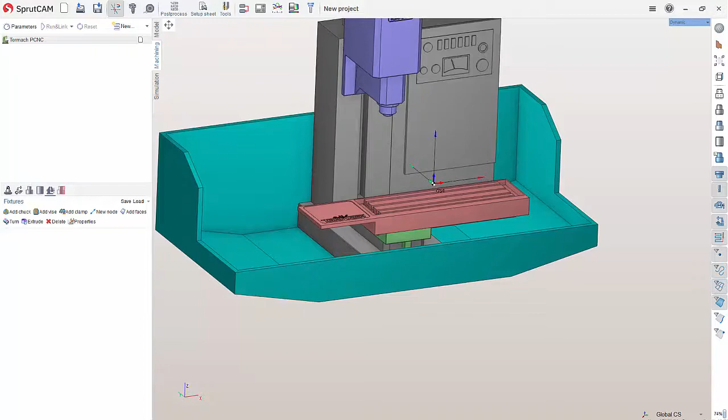Now to do this we first need to get the solid model. This can be found in the description below at our knowledge base for SprutCAM America, or you can also acquire it off the Tormach website on the Vise's product page. The part number for this is 35285.

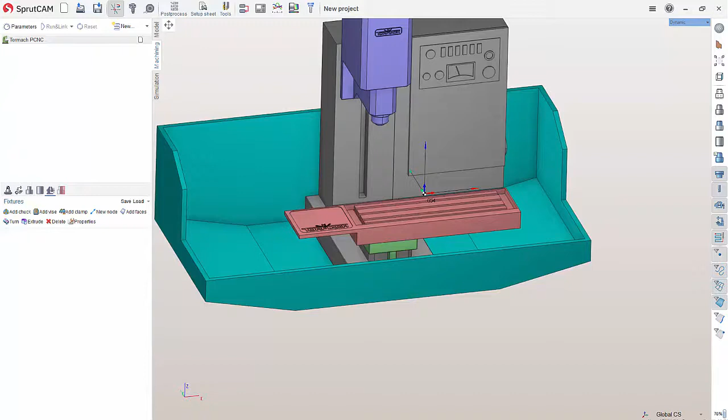Now I'm going to drag this 4-inch vise into SprutCAM. It can be either the IGES or a step, either one will work. Just going to let that load in.

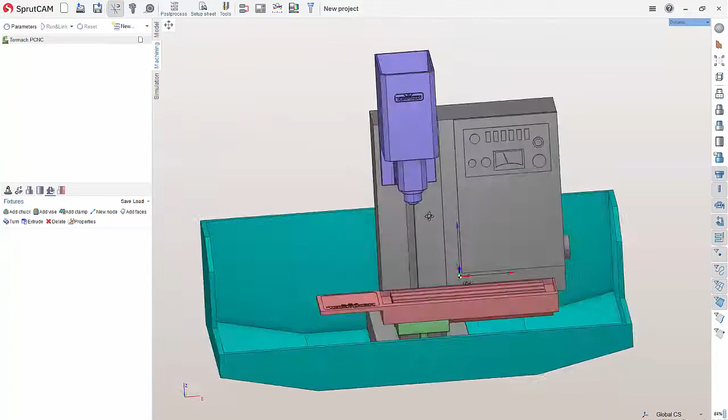So in here we have our vise. Let's get this oriented. Let's go to the model tab and click part, click the vise, and hit transform.

Now first let's get this rotated around the X so we can see what we're working with here. So let's just rotate this 90 degrees and hit apply. Okay, now we'll take a look at it.

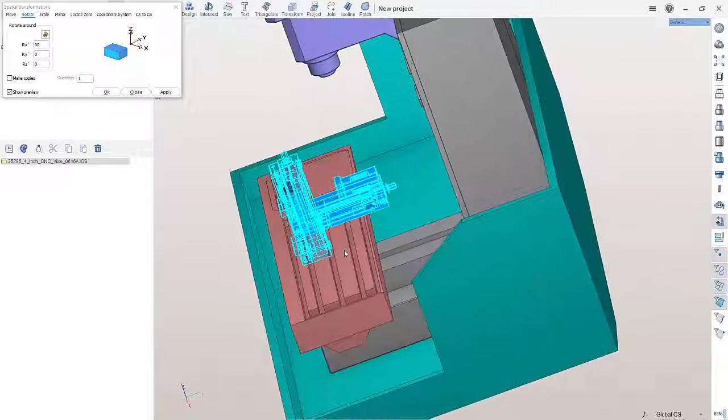We need to flip it around this way, so let's rotate this around the Z axis. Let's put 0 in X and around the Z 180 degrees and then hit apply. And we can then hit close. All right, so we now have our vise sitting like so.

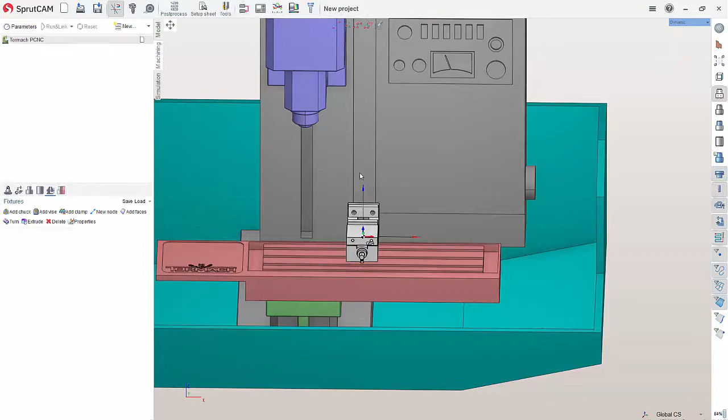So let's go to the machining tab and we need to select the faces for the jaws and the body. So let's hit, with the machine definition selected, go to fixtures and hit add vise. And then down here where it says body empty, double click empty.

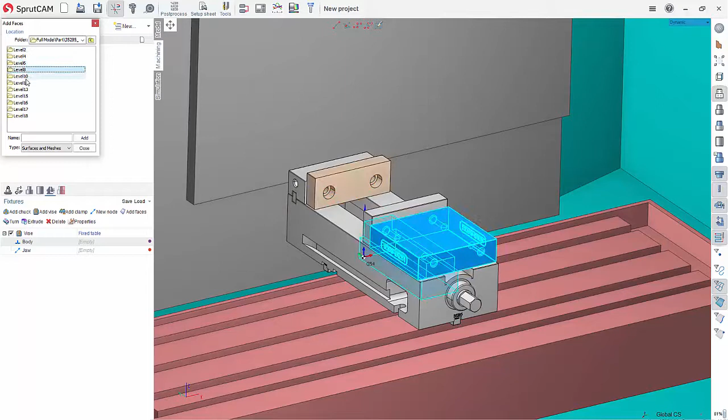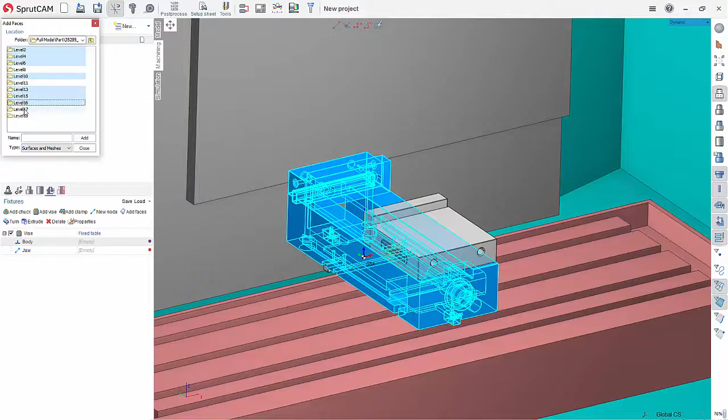Go into the model here and let's find all the parts here that are a part of the base. And it looks like this one is, this one is, this one is. So level 8 we don't want. Level 10 we do, we don't want level 11. And I think we can just select the rest of them, so I'm just holding down control as I'm selecting there.

Okay, and I'm going to hit add. And then I'm going to close.

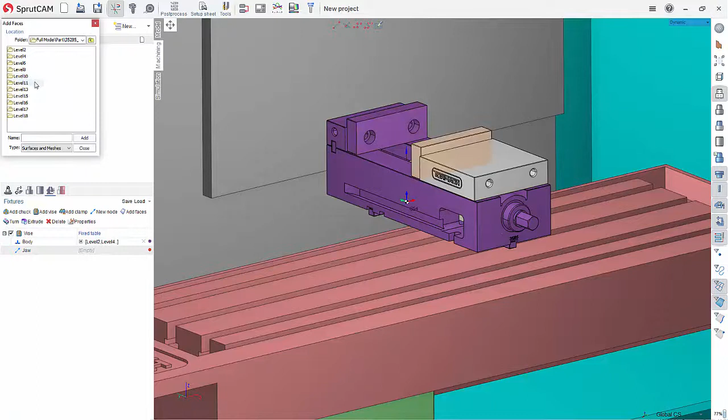And then let's go to the jaw, so double click there. And we're just looking for the parts, so it looks like 11 and 8, these two right here. And then let's hit add.

Okay, so now we've got our vise there. Now if I move this in, you'll see that the model is still showing from when we imported that in. So let's just turn that geometry model off.

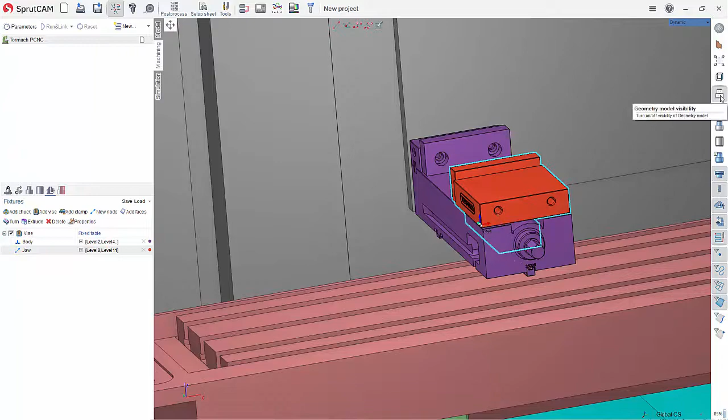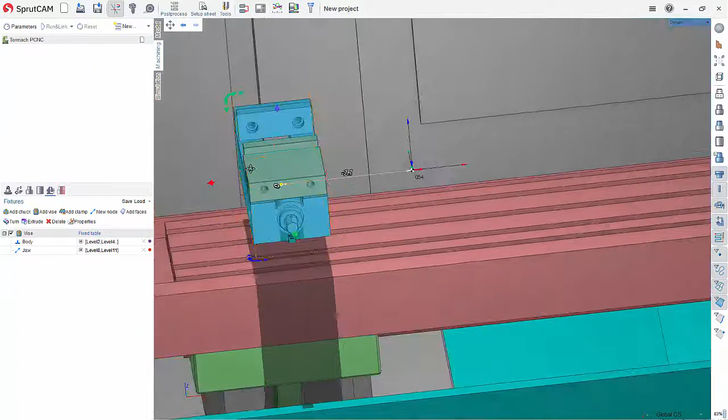All right, so we can now click vise and we can align this up. I'm going to show you two different ways to align this, but first we'll just do it like so. You can align this any way you want. So these arrows, red, blue, and green, will line it up in X, Y, and Z accordingly. And these will rotate it, the arrows that are on the corners in each axis.

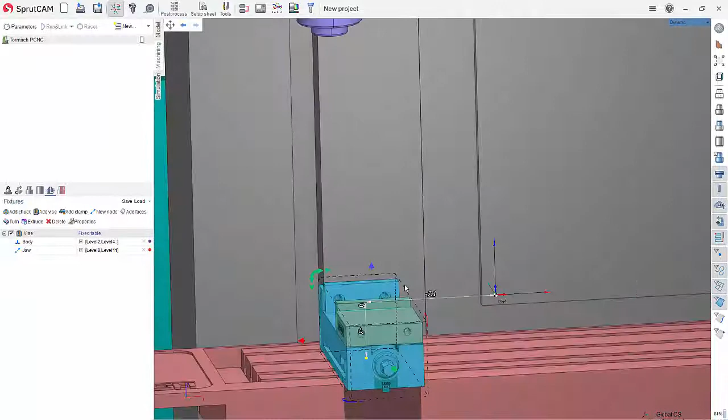Okay, so I want to have this lined up somewhere around here on the table. I'm going to grab this and I'll bring it down and it'll snap right to the table. You don't have to worry about it going through, you can force it through, but we can just bring that right down to the table.

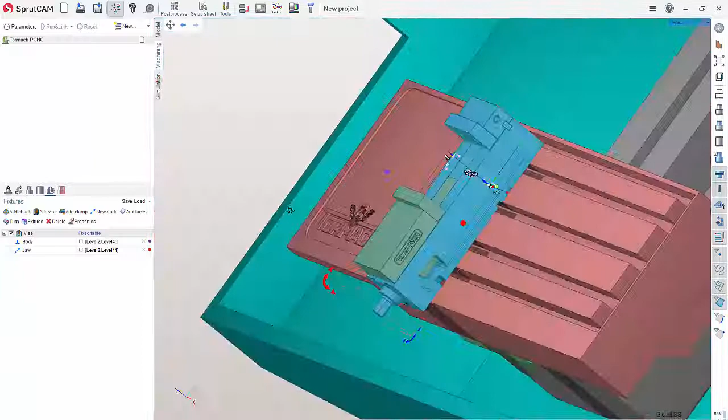And then we just want to line this up in Y. And again, you can kind of put this wherever you want it on the table, wherever you think that is about lining up with the T slots there. Okay, so we've got that lined up.

Now let's double click our jaw. Not over here, over here on the left hand side, don't do what I did. So double click jaw on the left. And here is where we are lining up this jaw.

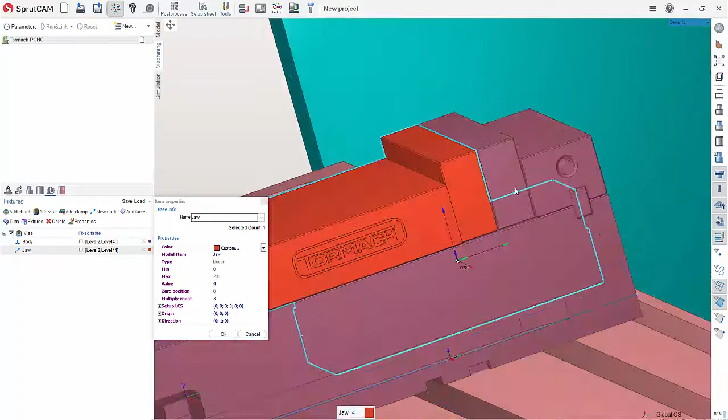Okay, now you can see this says 4 when we have this closed off. So let's set this to 4 inches. So for max, type in 4 and hit enter. All right, and that is it. All right, so those are closed.

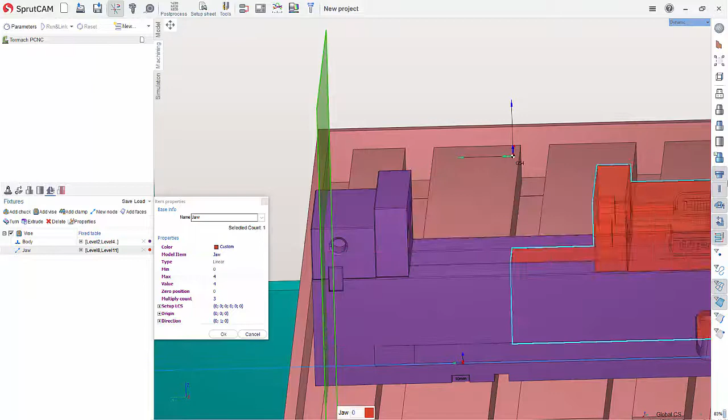And we don't have to touch this value, this has already been set, so it's really just that right there. And now you can see it won't go any farther. So just by setting that max to 4, we've got it. We can hit OK. Now we are ready to save this vise.

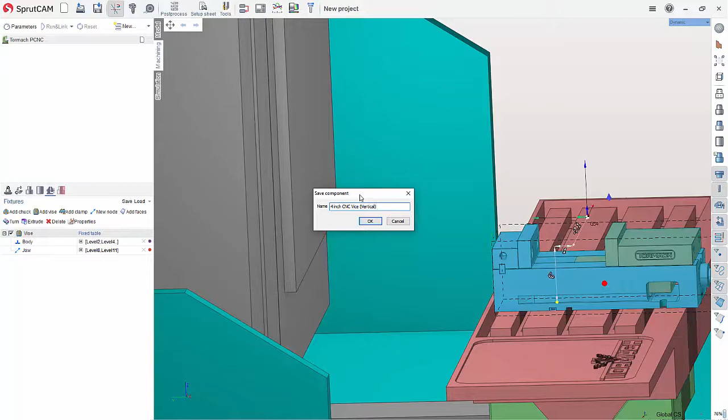So let's right click Vise and do save. And let's name this 4-inch CNC Vise. And I'm going to name it vertical on the side. You don't have to do this, but I'm just going to name it vertical. I'll show you why. I'm going to hit OK.

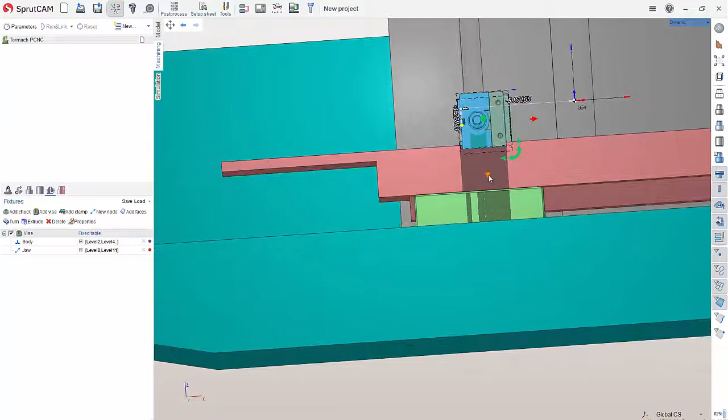Now, let's say because this is a CNC vise, you can turn this on its side. So we can click Vise here. All right, and let's rotate this along the Y. All right, and now we can set this down on here.

So why are we doing this? This is because you can use your CNC vise like so. So now you can come in here, right click and hit save.

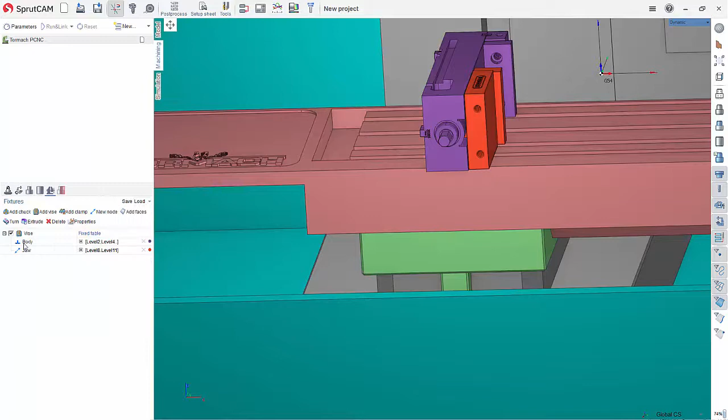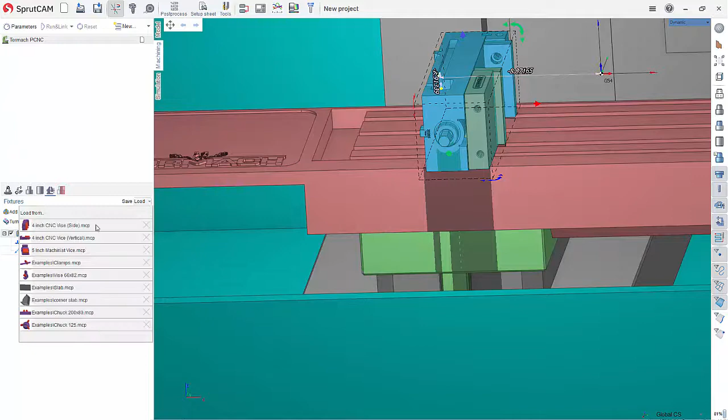And let's name this 4-inch CNC vise. I'll say side or horizontal, however you want to name it. So now you've got vertical and on its side. So this will give you 2 options then.

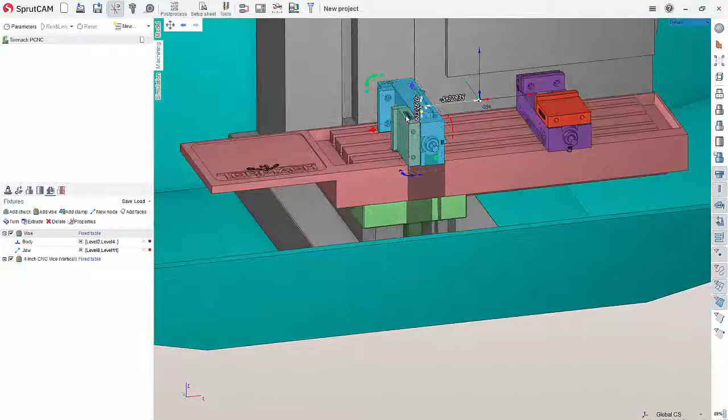And you know, if depending upon how you do this, you could do this again. Click Vise, rotate it around this way, and save it again, if you want to have another option in there. But that's essentially how you do it to get these into the software to use.